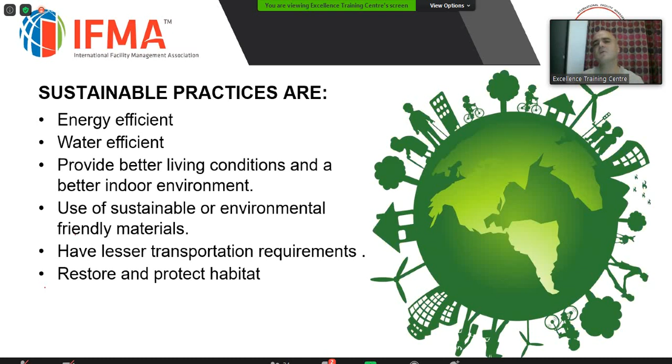All of you have looked at documentaries which show how much the greenery and natural habitat of animals have receded over the years. They say the most dangerous animal on this planet is us, human beings, because we superimposed ourselves on all other animals. We took their natural habitat, and in many areas we're paying the price. It doesn't come for free. Now the temperatures on Earth are higher than ever before. We're having floods in some parts of the world, and tsunamis, and lots of environmental change due to human impact.

So why shall we adopt sustainable facility management? It adds business advantage. IFMA has a very practical approach - they understand that if something doesn't make economic sense, companies won't adopt it, no matter how noble it is, because in the end companies seek to generate profits.

We will see how they consider something called the triple bottom line. We'll look into the definition of it - what it means is balancing the environment, balancing the economic aspect, and balancing human needs. These three we call the triple bottom line. It's a very practical, pragmatic approach which I really appreciate.

Sustainable facility management adds business advantage through increased company branding and image because of sustainable acts. Now with the new generation, and even the older generation, people are much more conscious toward the environment, and they like to buy products made from recycled material. Popular products like Starbucks advertise this everywhere - their cups say made from recycled paper. Google advertised how most of their facilities now run on 100% renewable energy. So it definitely has a big business advantage through company branding and image.

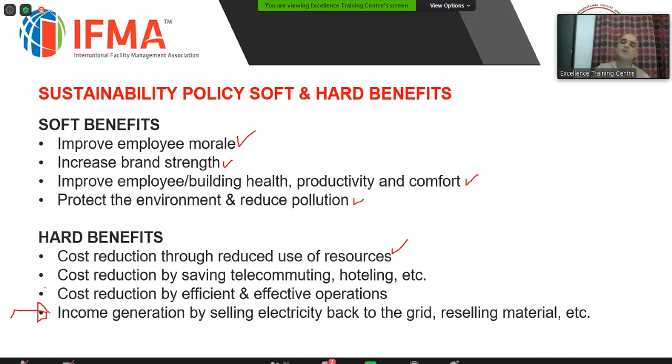The benefits of aligning the FM plan with the overall organizational strategy: whenever you want to do a plan as an FM, if it's aligned with the overall organizational strategy, it's going to take the management support and blessing. We will see this happening, whether it's for sustainability, health and safety, operations, or strategy. There's a separate module on strategy. The strategy starts with something on the top and gets affected into the day-to-day operations.

Examples, as I mentioned last time, there are two major real estate companies here which I use as an example. One is Ezdan, which is focusing on a strategy of having affordable accommodation. Another one is Al-Asmakh, or let's say Al-Fardan, which is focusing on luxury accommodation. Their strategy is different, their approach is different. And that reflects into everything they utilize, starting from what brand of ACs they utilize in their building. One company is trying to maintain a low cost, another company is trying to maintain a luxury.

So even the design of the compound, this company is making it with less amenities. The other company, because they want to reduce the cost to everyone... the other company is focusing on better amenities and charging a price for it. So similarly, if let's say you are a facility manager working in either of those companies, you have to make sure that whatever you're doing is in line with the organizational strategy.

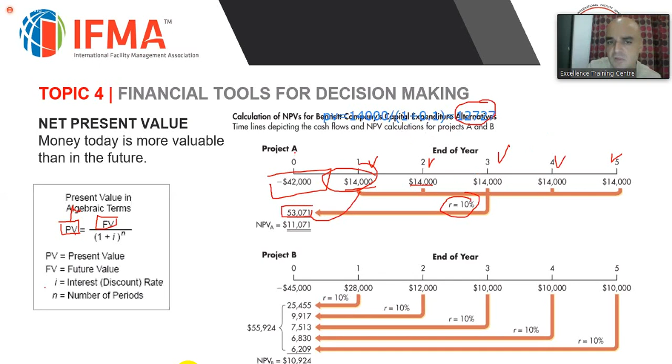So we are measuring everything in terms of net present value. Net present value is going to be 11,071. If the net present value of a project is positive, it means it's profitable. But if I'm comparing project A and project B, and the net present value of project A is higher than project B, it means project A is more profitable from a financial perspective than project B.

Everything else equal, it means that I will have to go with project A. So this is one of the tools that can be utilized to analyze the profitability of a project or an initiative.

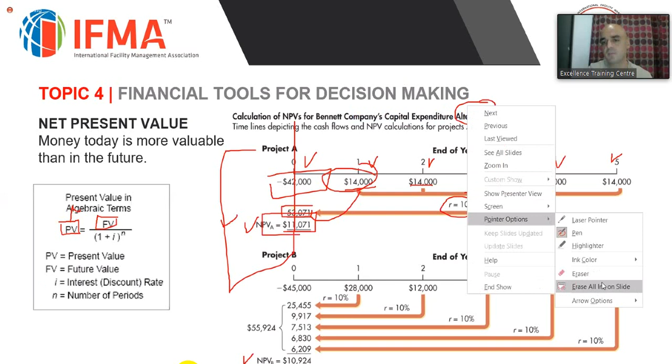Another financial tool for decision making, and this is an important tool when we're doing facility management, is called the life cycle cost analysis. Life cycle cost analysis is the whole life cost, or what we call it the cradle to grave. So the life cycle cost refers to the total cost of ownership over the life of an asset.

So when I'm comparing the procurement of AC A versus AC B: AC A costs 1,000 riyal, AC B costs 1,500 riyal. Shall I go for AC A because it's cheaper? No, not necessarily. Why? Because maybe when I'm looking at it from a life cycle cost analysis, even when I'm buying things, maybe AC A will have a lifespan of only 3 years, and after 3 years I'll have to purchase another AC. Whereas AC B will last me for 5 years.

So I'm looking at it: how much is the total cost of ownership from cradle to grave? What's the cost? Its design, installation, operation, the energy bill of it.

Maybe it will still last. ACB will last 3 years and ACA will last 3 years, but the bill that I pay for ACB is much less than the bill I pay for ACA. Then I'll go for option B.

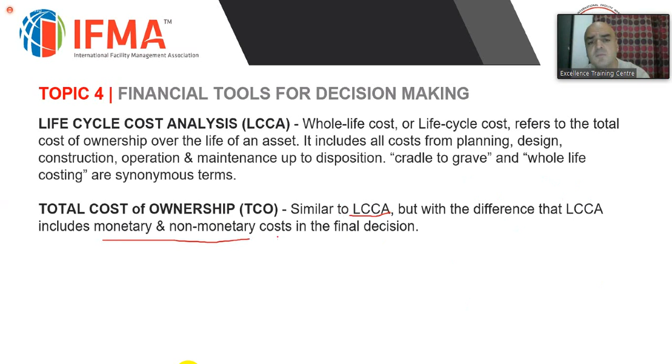This is what we call the life cycle cost analysis. I'm talking about the cost of a building from point A till its death. The total cost of ownership is similar to the life cycle cost analysis, but with the difference that the life cycle cost analysis includes monetary and non-monetary costs in the final decision.

Measuring and reporting, as we said earlier, an important thing to measure is to know. This applies to quality, energy conservation, financial reporting, and all. If you tell me that I lost 3 kilos, I will ask you based on what? You will not know if you lost 3 kilos if you didn't know that your weight was 80 kilos and now it's reduced by 3 kilos. So first is to measure.

You need to establish a starting point. If you want to measure how much you are losing weight per month, yes, Sheikh. Sheikh, you had a question? You can unmute yourself, no?

Can you hear me? Hello? Yeah, can you hear me? Yeah, I can hear you now. You were mute. Yeah, okay.

I just wanted to know, in the FM industry, do we have any standard ratio between the cost of a building and the cost of operation, or a thumb rule understanding? Okay, the cost of building, say, is 30 million. So over the period of 20 years of operation, how much could the cost of operation be? Do you have any such calculations in FM?

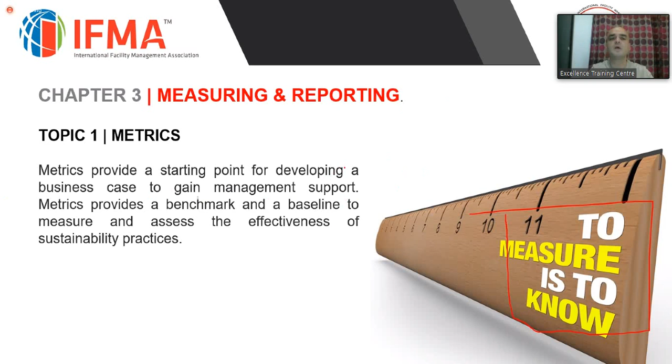Operational costs are very high. So metrics - we come back again to measuring and reporting. Metrics provide a starting point for developing a business case to gain management support, and provide a benchmark and baseline to measure and assess the effectiveness of sustainability practice. To measure is to know. You cannot tell me your building is energy efficient if you don't know how efficient it is - I'm going to ask you for proof.

Measure the greenhouse gas emissions. The greenhouse gases resulting from burning fossil fuel for electricity, heat, and transportation cause a greenhouse effect that keeps some of the planet's heat, that would otherwise escape the atmosphere out to space, trapped. Do you know what the greenhouse gas effect is? This is Earth - I'm sure you took it in science class, but again, this is Earth.

The burning of fossil fuels produces mainly carbon dioxide, and also carbon monoxide. So what happens is we have the atmosphere around the Earth, and usually the sun's rays come, hit Earth, and get reflected. Due to these greenhouse gases, a layer forms on top, and more sun rays get trapped inside - they don't escape into the environment. Sorry for my horrible drawing, but I think you get the idea. So what happens is the temperature of the Earth increases.

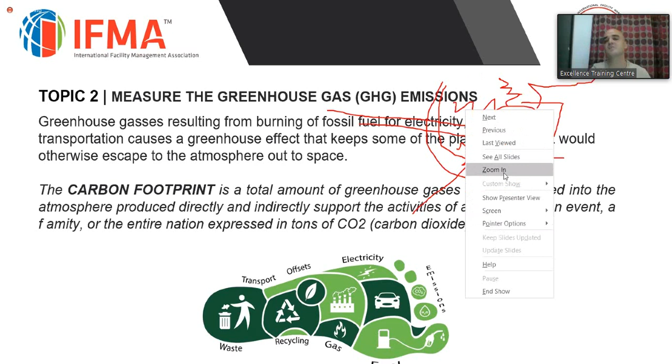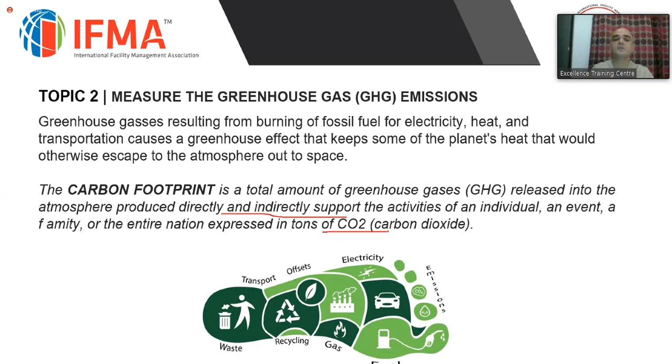So that's why we have what we call global warming. It's usually measured by the carbon footprint - most of you should have heard of it. The carbon footprint is the total amount of greenhouse gases released into the atmosphere, produced directly and indirectly, to support the activities of an individual, an event, a family, or an entire nation, expressed in tons of CO2. So now they rate organizations, airlines, specific businesses, even industries - such as the cattle industry, which is one of the biggest contributors in the world to CO2 due to the methane gas produced by the manure of cows. This is called the carbon footprint.

When we talk about direct and indirect, what does that mean? There are direct things - Scope 1, direct. These are the greenhouse gases, including CO2, hydrofluorocarbons, PFCs, and so on. So there is direct cost - let's say you have a company facility and your vehicles. These are direct costs. But there's also something upstream and downstream.

Upstream, you have business travel to your organization, employees coming to your office every day, leased assets, waste generated in operations, transportation and distribution, and so on. And down the line, you also have transportation and distribution. Let's say your organization produces potato chips - the impact of your product continues down the line until it reaches the client. So greenhouse gases have direct and indirect results.

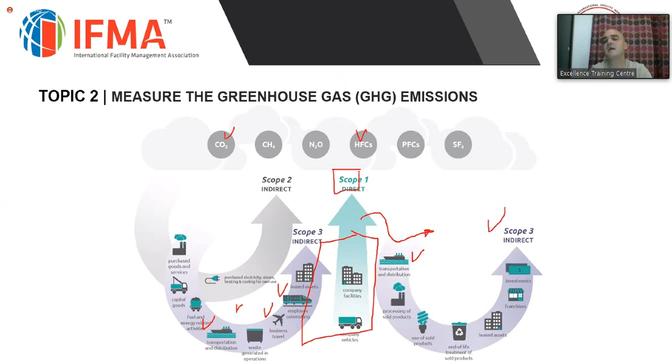There are certain standards that take care of sustainability. The most common one, which we are all familiar with, is part of the integrated management system, which includes ISO 9001 for quality, OHSAS 18001 for health and safety, and ISO 14001 for the environmental management system. There is also ISO 15192.

Anyone want to question something? Fahad, you opened your mic. Please, if you don't need to talk, don't open the mic.

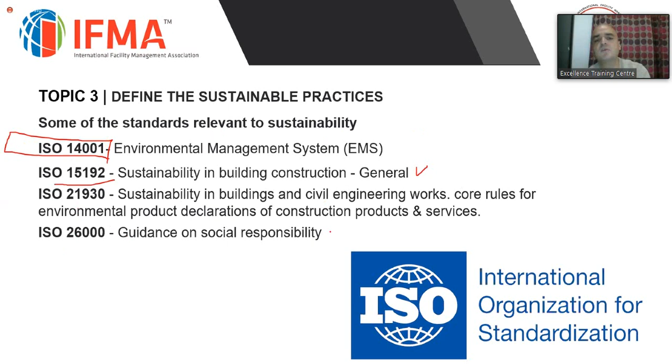So, sustainability in building construction - this is another standard, ISO 15192. There's also ISO 21930, sustainability in buildings and civil engineering works, and ISO 26000, guidance on social responsibility. These are just different codes provided by the ISO.

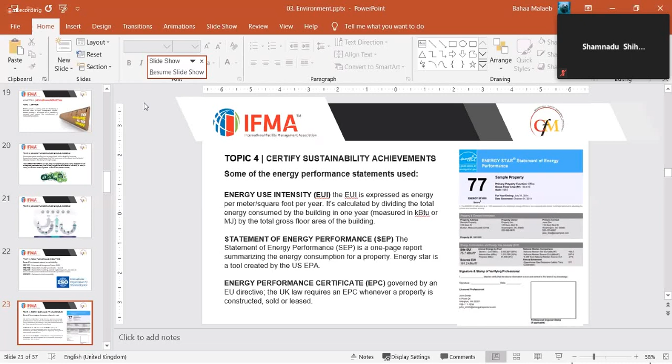So we were talking about some of the tools that can be utilized to measure and be utilized for sustainability practices. Does anyone know, has anyone seen this logo before? I remember it was coming in the startup with the PC. Yeah, you are old enough.

So this is the Energy Star. We're going to be looking at it. This is again one of the tools we will be looking into. Energy use intensity, EUI, is expressed as energy per meter square foot per year. It's calculated by dividing the total energy consumed by the building in one year, measured in kBTU or megajoules, by the total gross floor area of the building. This was a question asked to me earlier: how can you see a building's efficiency? This is one of the tools to measure building efficiency, because energy use intensity in a year per square meter or per square foot shows how much energy is being consumed by this building.

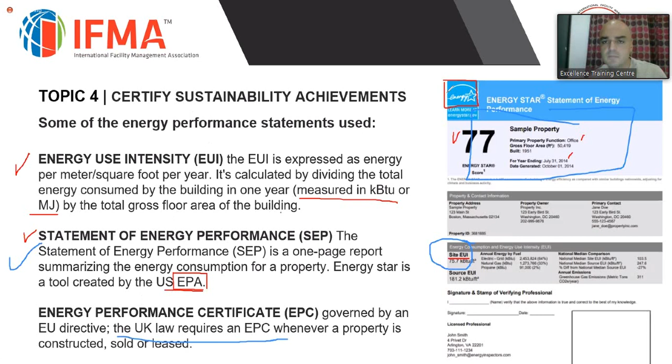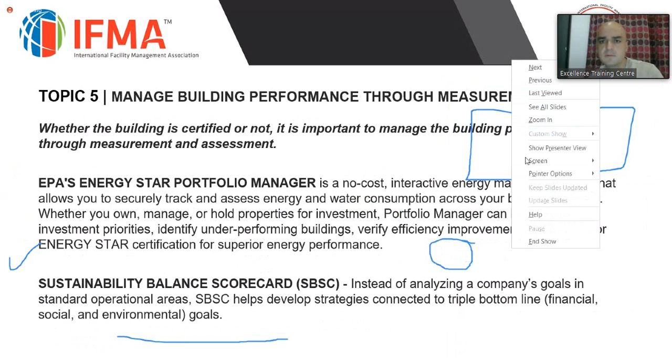Whether the building is certified or not, it's important to manage building performance through measurement and assessment, a tool by the EPA Energy Star. This is the definition from the EPA, the Environmental Protection Agency: Energy Star Portfolio Manager is a no-cost interactive energy management tool that allows you to securely track and assess energy and water consumption across your building portfolio. So you can even use it for all your buildings. If you're a real estate company with hundreds of buildings across the world, you can use Energy Star to record the data for each building and track their energy and water performance. Portfolio Manager can help you set investment priorities and identify underperforming buildings. When you start measuring, you start comparing. For example, my offices in Doha are way more efficient than my offices in Saudi Arabia. Per square meter, I'm utilizing this much energy in Doha, whereas I'm utilizing double that amount in Saudi Arabia, and so on.

Another tool is the Sustainability Balance Scorecard. The Balance Scorecard is a tool utilized by organizations to measure aspects of a business other than financial ones. What does that mean?

You see on the side sticker of new cars a rating of the vehicle, A, B, C, D, E, F, G. Similarly on ACs you see different stickers managing this. Different countries have different ways - the Europeans have their own measurement tool, Qatar is developing their own using GORD, and Saudi Arabia has their own rating system. That's why when you purchase ACs or washing machines at Carrefour, you'll find a star rating system showing energy efficiency. Even GORD recently installed a lab, and now they will require this for equipment too - they're gradually building it up.

We have an authority for standardization here in Qatar, a governmental authority, but it's a different one from GORD. The Qatar Standards Institute - I think it's called Qatar Standardization - they're the ones who make the Qatar Construction Code, QCS, Qatar Construction Standards. Each country tries to localize and customize based on their needs, priorities, and how they measure things. They're starting this now and it's getting more traction.

That's why you now have Tarshid, for example, in Kahramaa - they're trying to reduce electricity and water consumption, and it's a need. Why? Although we don't have potable water in Qatar, we don't have storage of water - all the water we utilize is desalinated. Desalination is a very high energy intensive process, it costs money and causes environmental damage. Qatar is very highly polluting per capita due to the presence of oil and gas facilities, so they are working on all of this in accordance with international accords and commitments, and improving a lot.

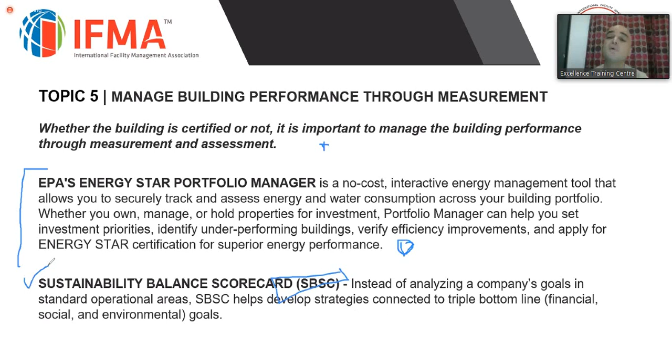So continuing on the sustainability balanced scorecard - financial tools will be covered in detail in the business unit, how to measure organizations. In a nutshell, sustainability can be added as a goal or as a tool to measure your performance as a company - how sustainable you are. It's like adding another layer to your measurement which includes sustainability.

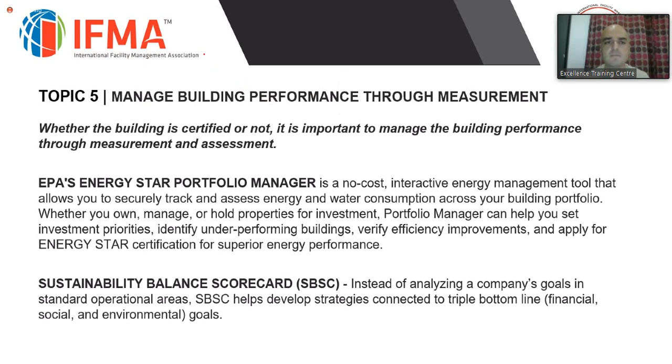There are focus areas for sustainability. In sustainability in FM operations, we said there are 8 areas, and these 8 areas are divided into input, process, and output. Input is in terms of consumption - how much energy, water, materials, and resources I am consuming.

Process is how I do things, how I manage my workplace, how indoor environment quality is measured. For example, am I setting the temperature at 18 degrees Celsius - then the inputs will change. Am I putting it at 25, and so on. And the quality of service - what services am I providing there.

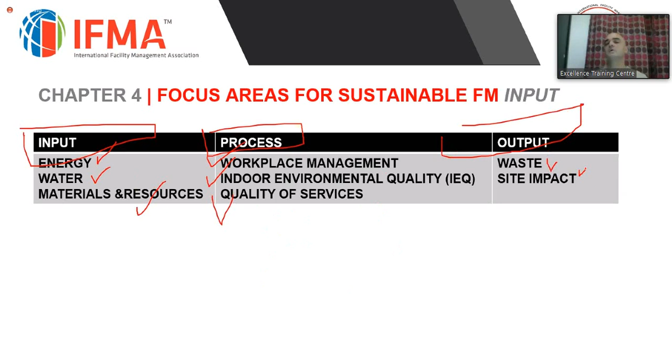The output is the waste and site impact. The waste is what we are producing, whether water waste or noise. The site impact is how much I'm affecting the environment around me - am I causing light pollution, heat pollution, other disturbances, noise pollution, and so on.

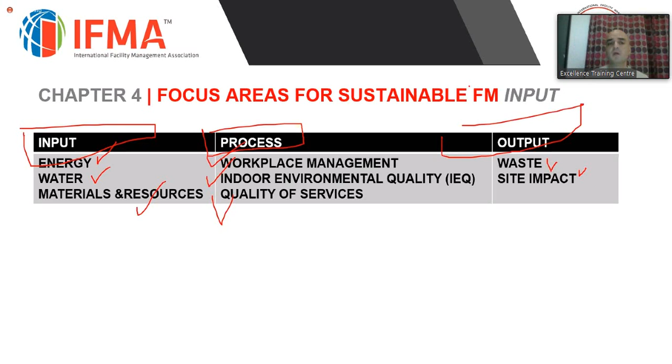So looking at them one by one: energy. Some strategies to lessen facility energy usage include improving the building, adding insulation, inspecting solar gain, or improving core systems. Energy and water are among the most prominent areas where you can make immediate savings, especially if you start in the design process - that's why rating systems like GORD's start with the design. The Qatar Green Building Council is separate from GORD.

GORD is separate. It's the Gulf Organization for Research and Development, or something like that. They were trying to create something that applies not only to Qatar, but to the whole Gulf - that's why they called it GORD, not Qatar whatever. I think the Qatar Green Building Council started on it, but I don't want to give theories - I don't know. I know the main thing is through GORD and the GSAS certification, not the Qatar Green Building Council.

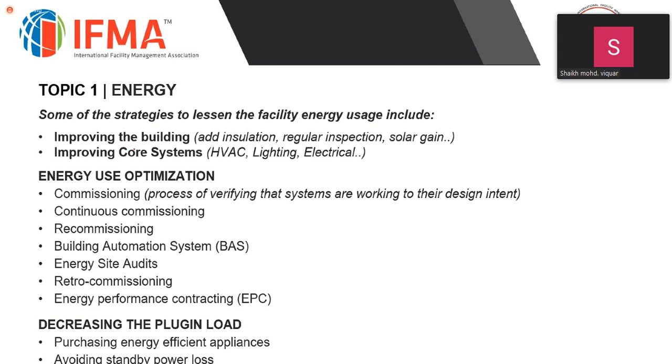So, energy use optimization starts with the design. If you utilize good design, that definitely costs more. If you use good insulating material, your energy bills will be cheaper.

GORD is supported by Qatar Foundation and the SC, the Supreme Committee. They have their offices at the Qatar National Convention Center, the QNCC, and they have very nice facilities on the backside, including a laboratory there.

Energy use optimization, continuous commissioning - there are some other tools. You can improve the building by adding insulation, regular inspection to check for leakage, improving the core systems, the HVAC, the lighting, and the electrical. In a typical building, the most energy consumption comes from the HVAC - it's 40% to 60% of the energy consumption. Then comes lighting, then other things like electrical, depending on the building type.

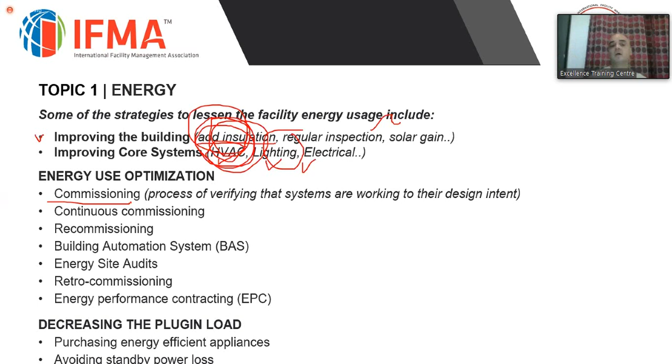You can optimize energy use through commissioning. Commissioning is not only testing the building and equipment - it means making sure the equipment is operating as per the intended design. For example, if I'm installing a pump that's supposed to provide a certain water head at a certain energy consumption, and commissioning shows it's not giving me that water head at that energy consumption, it means I need to do some adjustment to the pump. Commissioning is the process of verifying that systems are working to their design intent.

That's why an important concept in energy optimization is called continuous commissioning. It means that, unlike the usual process where you check the system once at handover and everything is perfect, the biggest challenge happens during operation. If a building is efficient at handover, but down the line you don't maintain it properly or check your systems properly, what guarantees that you're still operating at normal efficiency? So we have continuous commissioning, which means continuously checking the performance of equipment based on the intended design.

This continuous commissioning has been made much easier now using smart equipment. Those of you who operate facilities with new Trane chillers, York, or whatever, you have continuous live charts showing how much energy is being used. They're linked directly to your building management systems. You get graphical, historical data, and immediate data on your efficiency - you don't need to go check it separately, you get this data on an instantaneous basis.

Building automation system is very important. So what's a building automation system? A BMS - building automation and control system, or building automation system, or building management system - is very important because it controls the utilization of your HVAC and other systems based on your occupancy needs.

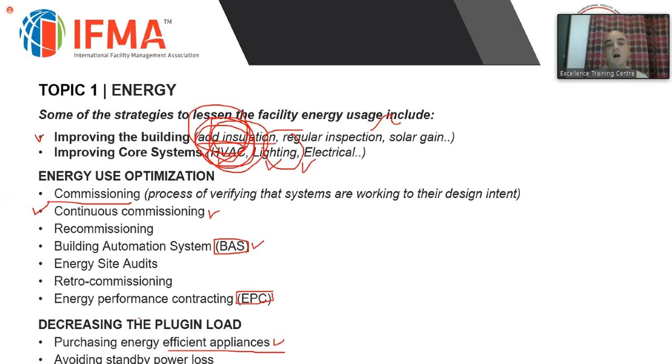Avoiding standby power loss.

Use of on-site renewable sources of energy. There are many ways to do that. We all know the famous solar power panels. Solar power panels are becoming much more efficient than they were, and the growth is very good. They are becoming much more reliable than before. Still, they are not 100%, but we are almost reaching there. Maybe it'll take some more years. 15, 20 years ago, they were not as efficient as they are now. Many companies are working on several technologies to try to improve the efficiency of solar panels, and generating power is there.

Another thing to utilize is called biomass. What's biomass? Usually this is utilized in farming communities and agricultural economies. The crop that you get from harvesting, let's say you have a cornfield, the stem and other parts of the corn are supposed to be disposed of. So what you do is take this organic material and subject it to anaerobic digestion, and as a consequence you will ferment it and get methane. Methane is natural gas. You can burn it and generate electricity, or utilize it to heat and dry wood chips, plus sales of biomass for boiler. This is a tool utilized in farming communities, used in the States or in Europe because they have lots of material.

How can you reduce standby power? Disconnect the items. At home, if you have plugged-in appliances, just disconnect it, remove the plug, because even if you keep the plug there, there'll be some kind of energy leakage. So this is the way to cut standby power. If it's not in use, remove it, unplug it or disconnect it totally.

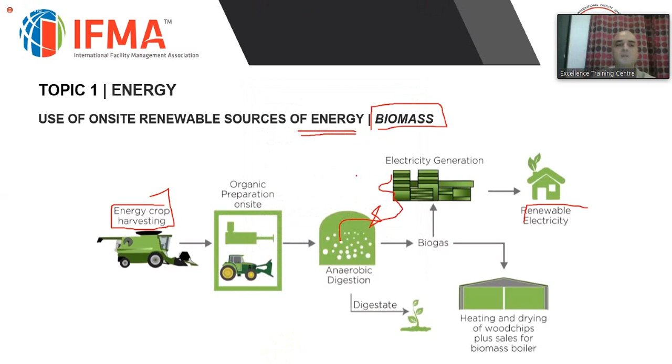Use of on-site renewable sources: geothermal energy. Geothermal energy can be on a very large scale or a smaller scale. On a large scale, there are countries such as Indonesia, which are on top of volcanic areas. What they do is drill a hole into the ground and reach a level where there is steam. So you're getting geothermal energy. You take the steam and run turbines with it, generating electricity for free. It's a renewable energy source.

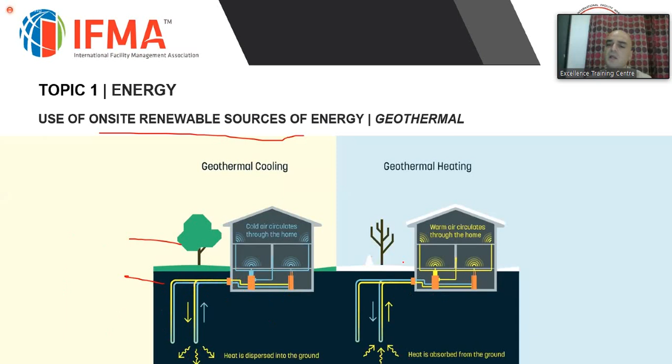On a smaller scale, it's still used in some places in Europe, for geothermal cooling. Usually in summer, the earth is colder than the surface; in winter, the opposite happens, and the earth is warmer than the surface. So what you do is take a pump and circulate water. In summer, you get cold water out and hot water in. In winter, you get cold water into the ground and hot water out.

Another utilization is micro wind turbines. Have you seen those at Qatar Foundation, Qatar Education City? These are micro wind turbines. They are put there, though I don't know how effective they are, and I don't think they are running. But again, this is one of the technologies utilized so that you can generate micro power on the side.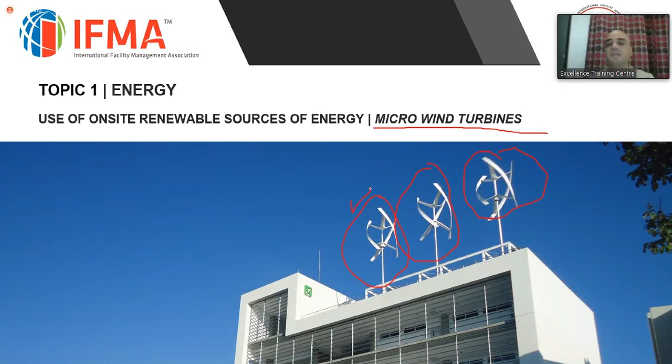So these things have been evolving, and they are the future. Yes, some of them are still not very efficient, but some of them are becoming efficient. I've seen, like, these micro hydro turbines.

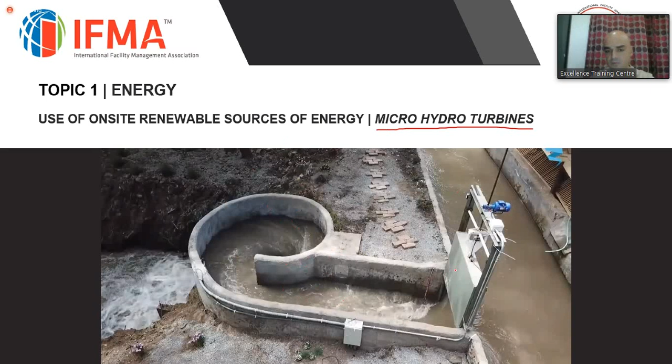I've seen them in certain remote areas. They are very efficient small hydro turbines. Let's say you're next to a river, it's a micro turbine, a smaller turbine which generates electricity from running water. With a simple installation, you can generate power, monitor management, and energy use.

There is something called load shedding and load shifting. What does load shedding mean? Load shedding means you shave the load. You say above a certain level, I cut the power. You simply cut the load.

Load shifting is that you take the load and utilize it at different times. Say you're running a factory, and rather than utilizing certain megawatts per day, you shift to a night shift, and you sort of flatten the curve. You take the items here and put them there. In load shifting, the overall consumption stays the same. In load shedding, the overall consumption is reduced.

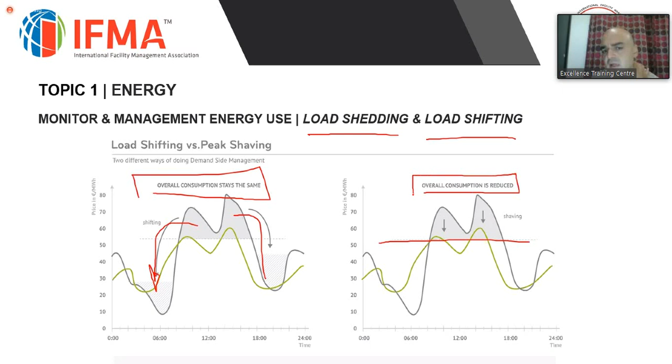Demand response contract. What's a demand response contract? It's an agreement between the facility and the power producers to find ways to reduce consumption during peak hours in exchange for monetary incentives. In other places of the world, I don't see it here.

So you're having a factory, and the government will come and tell you, look, you're consuming this much megawatts per hour, and we have a deal for you, since you're utilizing it during the day. If you shift your load to the night, I'm going to give you electricity at half the rate. So this is called a demand response contract, an agreement to find ways to reduce consumption during peak hours in exchange for monetary incentives. So the power company is trying to shift the load to match their needs.

Because what happens in power consumption, even on the scale of a country, it's not consistent. The power utilized during the day is different from the power utilized during the night, different from peak or off-peak hours. In Qatar, fortunately, we have enough resources that we don't feel it, but in other countries with limited resources, it has a huge impact, and they try to manage around it.

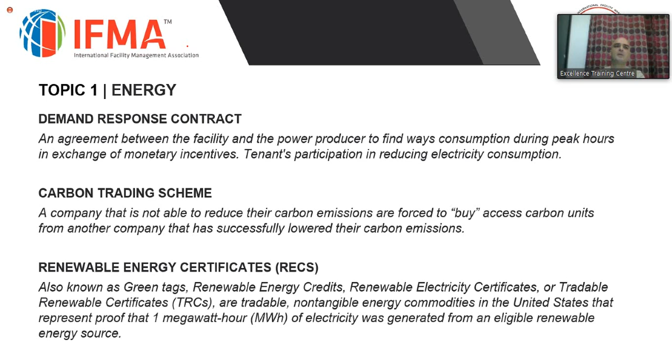What does that mean? Part of the environmental requirements is that you get incentives. If you are a company producing this much, one megawatt hour of electricity from renewables, you get this renewable energy certificate. So rather than investing and proving to the government that you're producing this, some people are making it their business. They go and build solar farms, sell electricity back to the grid, and utilize this to give to other companies who buy it from them.

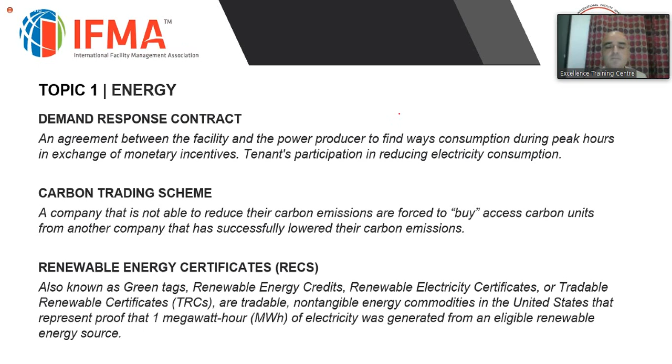Water, how to reduce water consumption. We see it now with Tarsheed and what they try to advertise: aerators, high efficiency faucet aerators. What's the aerator? It's that attachment. Most faucets now come with aerators, and they can reduce faucet usage by up to 50% or more.

High efficiency shower heads. For those of you who work with sanitary ware, water consumption has become part of the sanitary ware requirements set by consultants. Previously, toilets used to come with a standard flush bowl around 6 liters, sometimes as much as 11 liters. This was changed later on, and now you have toilets that use a half tank or a full tank option. So there are many ways for you to reduce consumption.

Replacement of leaking fixtures: leaking can represent 5 to 10% of total building water usage. You can see how large that is, so it's important to monitor leaks.

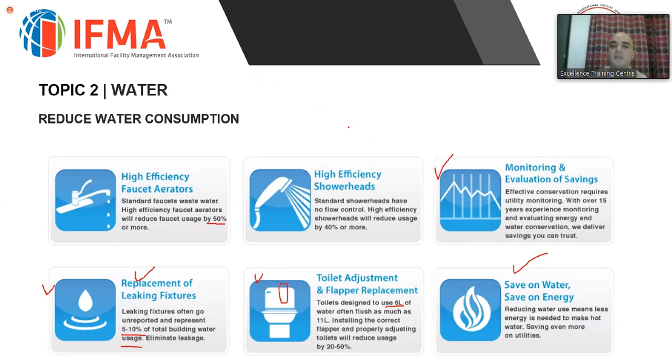Regarding water or energy consumption, there are different tariff types which countries or service providers utilize. Here in Qatar, you can design your tariff system to dictate certain consumer behavior. A flat tariff is one that stays flat - whether you use it day or night, high or low consumption, you're charged a flat rate. It doesn't direct any particular behavior.

The inclining block tariff means the first part of electricity or water usage is cheaper than all usage after it. In Qatar, they use an inclining block for residential customers. So if you have a villa in Qatar, up to a certain consumption level they charge a certain rate, which they believe is the average rate. Above that level, the bill starts becoming very expensive. That's what we call the inclining block.

The declining block is a different approach - the opposite. The first part of electricity or water usage is costlier than the rest. This is usually utilized for industrial facilities. So if you have a certain need, you pay the base rate, but if you need more, you get it at a lower rate.

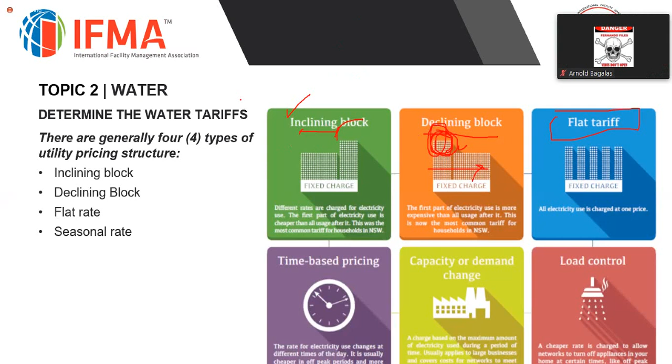So I was talking about the different pricing tools which energy and water providers utilize. We have the inclining block, the declining block. Another tool is time-based pricing. Normally energy has heavy utilization during the day when countries, factories, and offices are operating. To encourage people to shift their behavior, I can give a reduced price after midnight. This is where the rate for electricity changes at different times of day.

Capacity or demand change is again an incentive linked to demand. You go and tell the industry, if you shift your demand, I will give you a certain incentive.

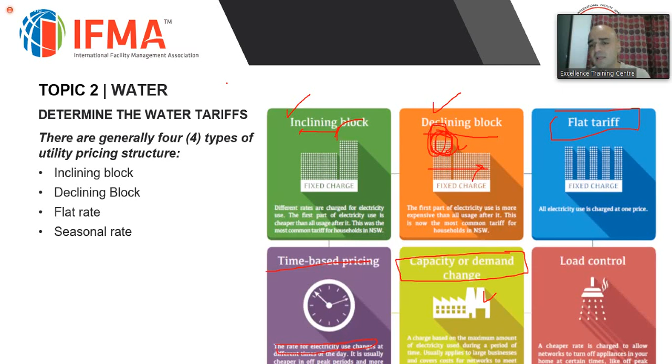Load control: a cheaper rate is charged to allow networks to turn off appliances in your home at certain times, like off-peak hot water. Those of you from countries with power problems are aware of these things. Many countries used to shift consumer behavior, even doing things on TV and advertisements trying to shift the daily home operations, telling you to wash your clothes at night, for example.

Some of the goals of sustainability are as follows. We talked about energy, we talked about water. Now we're talking about the third input, which is material and resources.

We talked about using less material, using material from recycled or sustainable sources. So rather than utilizing raw material, in terms of wood or water, companies will tell you this is made from recycled paper, or made from repurposed wood that they compress.

Purchase materials in a sustainable manner. The most famous paper manufacturers, if you read the labels in detail, will say this is done in a properly harvested forest, made from trees controlled in a sustainable manner, and that they are planting trees sustainably rather than tearing down the rainforest.

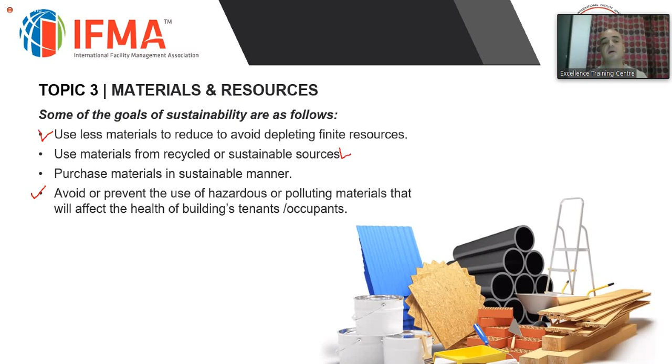Avoid or prevent the use of hazardous or polluting material that will affect the health of building tenants or occupants. An example is asbestos. It was used a lot in buildings as a good insulator, but then they found out asbestos is carcinogenic, and it took the world several decades to try to remove it as a construction material. Maybe some countries are still utilizing it, I don't know. It's a highly carcinogenic material.

Sustainable procurement is meeting the needs of material, goods and services in an environmentally friendly, responsible, and ethical way. So ethics come into play also, in how much you are supporting the local economy. Many companies promote that they are buying products produced by the local community.

Sustainability means continuity. It means we are not only doing it for the sake of profitability, but to carry the people around us. Some companies will use material and say it's manufactured by veterans or by prisoners and so on. These are again tools for sustainability.

Benefits of green procurement: savings, positive relationships, improved employee health, environmental and climate protection benefits, promoting the local economy. We see the same benefits of adopting sustainable practices repeated again and again.

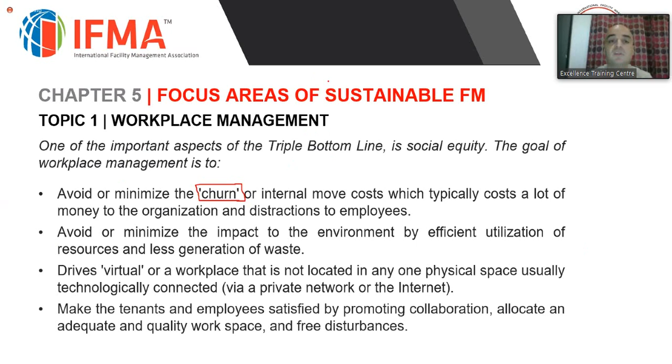Flexible use of workplace, apart from efficient space utilization and avoidance of unnecessary office expansion, the power of flexible workspace is to increase collaboration, which will result in greater employee productivity.

A virtual workplace is a workplace that's not in one physical space. This is what we talked about with hoteling and telecommuting. Telecommuting means working from home or similar. Hoteling means that I don't necessarily have a permanent place in the office, I don't need a designated space—think of an organization that has people who are on the sites.

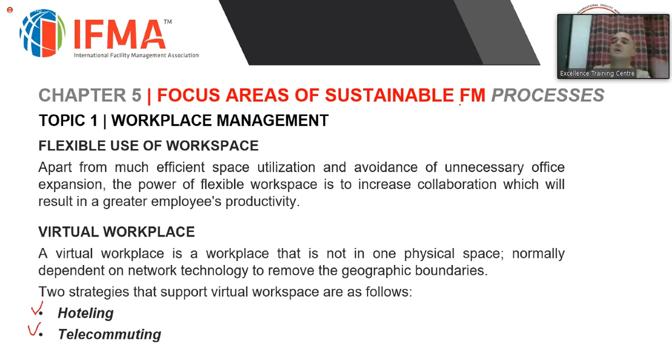I don't need to keep an office room for each and every manager I have. I can have hoteling, which means a unit of desks that are free for whoever comes, and we can book them and utilize them. This is again a modern way of dealing with space management.

Usually organizations follow a global trend of moving towards smaller spaces, where people can work from home more. We've seen this, and COVID-19 really pushed heavily in that direction. We found out that many jobs can be done from home, with little or even better improvement in efficiency.

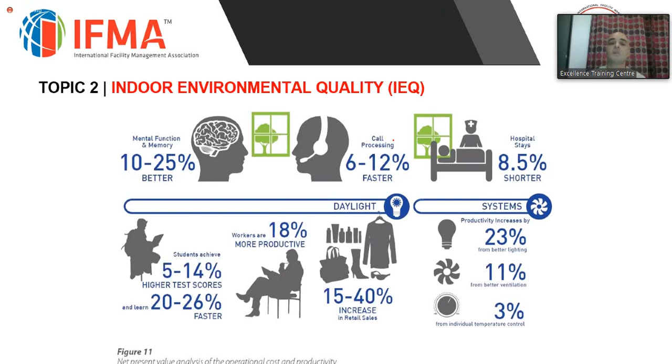Another thing is indoor environmental quality. This is an extract I took from the health and productivity benefits of LEED certified buildings, a net present value analysis of operational cost and productivity. Not only does operational cost get reduced, but productivity improves, because indoor environmental quality considers air quality, temperature comfort, and even how much sunlight you're exposed to. These things affect your productivity. This research shows better memory function, mental function, better call processing, shorter hospital stays, more productive workers, more productive students, and increased retail sales due to the better environment and comfort of shoppers.

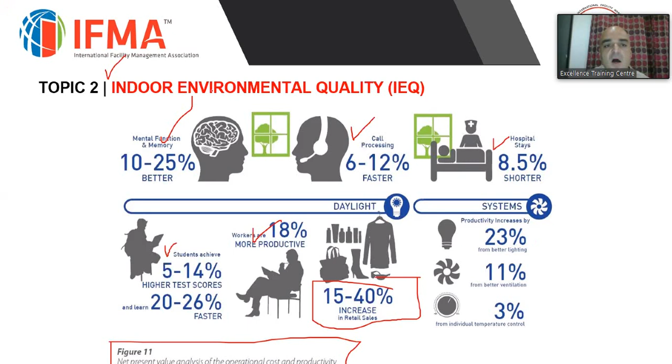For example, a very simple illustration: there's a whole science in marketing called consumer behavior, and big organizations have made it a science. That's why when you enter a Carrefour, the lighting is always very bright, 24/7, and Carrefour doesn't have windows for sunlight. Why? Because they want you to lose the concept of time. They've done their research, and with higher, more comfortable lighting, you're likely to spend more time at the store. When you spend more time at the store, you spend more money. So we can see how indoor environment quality has a huge impact on our behavior.

Air quality is part of environmental quality. As I said previously, the air inside is more polluted than outside, typically 2 to 5 times more polluted. 90% of our lives are spent indoors.

Maybe in Qatar, hoteling means hot desks. Yes, Najitha, this is what it means. Hot desk is part of hoteling. It can be hot desk, hot offices, and so on.

Indoor environment quality involves common indoor pollutants. There are many pollutants indoors: airborne particles from diesel exhaust, dust, smoke, and other sources; indoor formaldehyde from furniture, cleaning chemicals, lack of proper circulation, and the air we breathe out from people all contribute to bad air quality. That's why it's very important to have proper ventilation, starting from the design of the HVAC system, to its operation, and to its monitoring.

These are different things which can generate bad air: smoke, poor circulation, toiletries, mold. Mold is a very bad influence on indoor environment quality and air quality, and it can create serious health problems. Cooking fumes, candles, electronics, and so on also contribute.

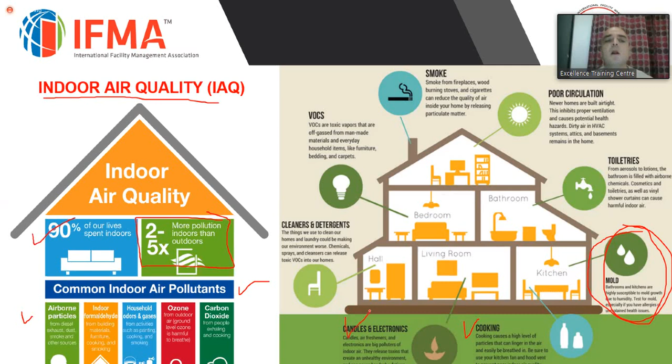So there are many things that can affect occupant comfort, including thermal comfort. The number one complaint of building occupants globally is thermal comfort. This is shown by research—people complain that it's either too hot or too cold, too drafty, or too windy.

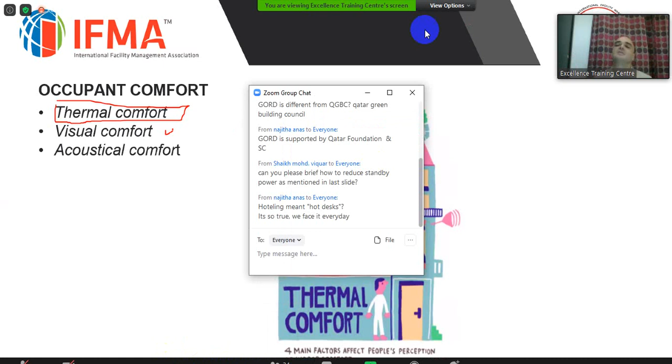Visual comfort is also important—how relaxing it is, how the lights are, how crowded the place is. That's why when you go into a hotel, everything is designed to make you feel relaxed. Even when you enter, fresh flowers are put there, the colors are vibrant, and the design itself includes a huge lobby. All of this is for visual comfort.

Acoustical comfort is about what you hear, how much sound is coming in. All of these four factors contribute to occupant comfort.

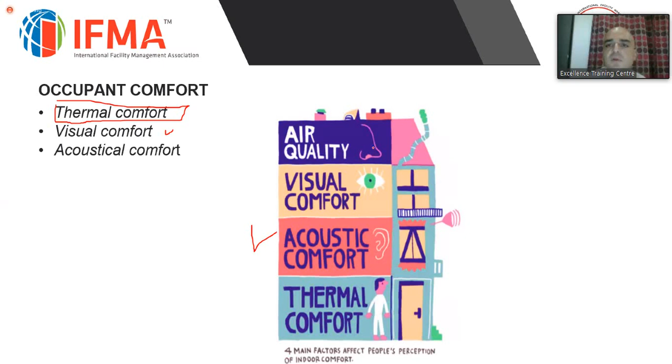Control of hazardous material. A hazardous material is any item or agent which has the potential to harm humans, animals, or the environment, either by itself or through interaction with other factors. There are different ways to handle hazardous materials. The best is to eliminate, physically remove the hazard. Substitute it - rather than utilizing a harsh chemical to clean the floor, use something environmentally friendly. Engineering controls isolate the workers from the hazards. Administrative controls change the way the work is performed and change the cycle of operations. The least effective is keeping everything as it is - it's inevitable, but to protect people you let them wear personal protective equipment.

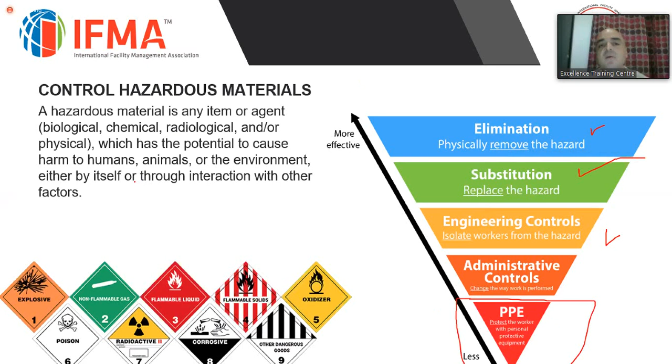Quality of services. Sustainable services are offerings that satisfy customer needs and significantly improve social and environmental performance. This can happen in terms of sustainable mail services, sustainable meeting services. So in the way services that you are offering, whether they are mail services or meeting services, you can adopt sustainable practices to handle them.

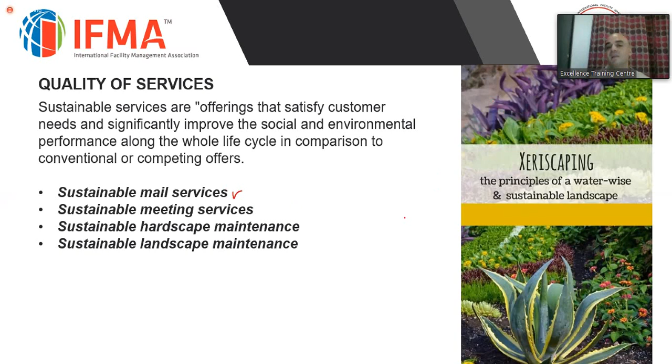One nice topic to mention is landscaping - sustainable landscaping through xeriscaping. What's xeriscaping? It's designing from day one, designing the landscape to utilize less water. You can maintain a beautiful garden which requires less water.

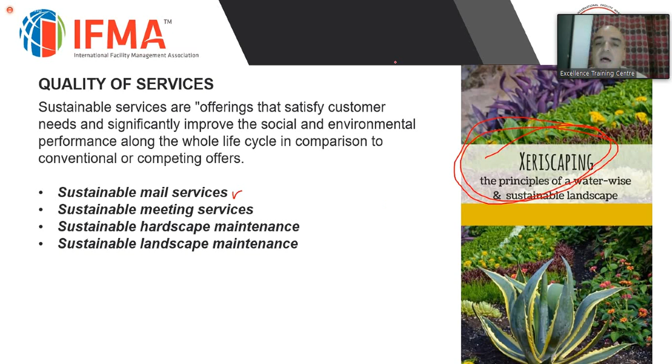If you observe, one of the areas where they have utilized this is the airport - the new airport. If you look at the landscape of the Hamad International Airport, you can see a different type of plants there, mostly desert-based plants. They are beautiful, but they use less water compared to, let's say, the flowers planted on the Corniche. You see how unsustainable they are - very beautiful, but they need a lot of water, and a lot of changing because the plants die quickly. So xeriscaping is the concept of utilizing plants and design from day one to secure sustainable operations.

We talked about the input - the energy, the water, and the material and resources. We talked about the process, and now we're talking about the output. The output, we have waste. Waste collection is a part of waste management. It's the transfer of solid waste from the point of use to the point of treatment or disposal, to the landfill. Methods of solid waste disposal and management.

Composting. There are different ways to handle waste, going from the environmentally conscious ones to the very unenvironmentally friendly ones. Open burning is a horrific way to get rid of waste - you are throwing carcinogens and fumes into the environment. Composting is a very good way, but it doesn't apply to everything. Composting is when you bury items which are biodegradable - you can compost natural materials such as wood, such as food waste.

Dumping into the sea, again, is not very sustainable. Fermentation or biological digestion - this is what we covered regarding biomass - you go and ferment it, but it depends on what waste you are dealing with. Incineration means burning, and it's typically used for certain things which cannot be disposed of properly - for example, medical waste, which you cannot recycle. It is not good for you to recycle it; you have to incinerate it, burn it at a certain degree to remove all the chemical pathogens. Salvaging means restoring it - maybe you can utilize it in something else.

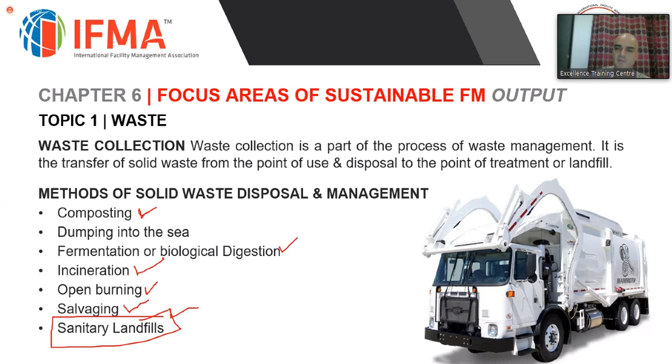A common way for disposal is sanitary landfills. Sanitary landfills are where you segregate the material, compact it, and bury it underground in a proper way, taking care of water collection with a designed system. This is a very common way of handling waste - many countries utilize sanitary landfills. After they have segregated the material, seen what can be composted will be composted, and what can be recycled will be recycled, the rest goes into sanitary landfills.

Construction and demolition waste management. Wastage resulting from construction and demolition includes concrete, wood, gypsum, glass, plastic, metal blocks, etc.

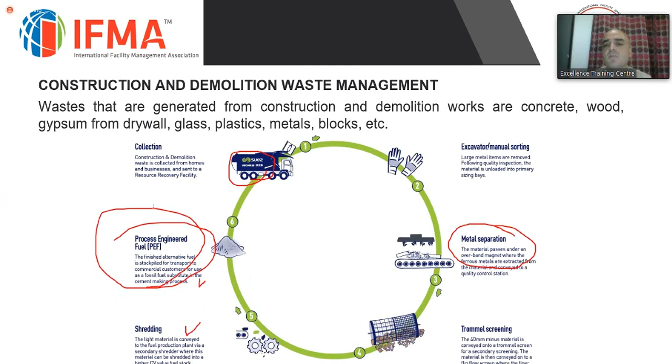This chart I took from a site of Suez, GDF Suez - this is a French company. They are famous for how they handle this, which is indicative - they take it, crush it, collect it, separate it, crush it, use metal separation, and steel can be utilized elsewhere. Then they do screening - some items can be used as processed engineered fuel, wooden products, some items can be added there, and shredding for light metal, and so on. So this is a proper way of handling construction waste.

Here, even in Qatar, construction waste has to be handled. There are certain areas where you can put it. Some years back, they opened, I think, the Mesaieed waste treatment plant - it was not there before.

A proper recycling scheme starts from the source - they call it separating at the source. That's why many recycling programs which countries try to utilize fail, because unless people are educated at the source, whether it's from homes, it won't work. That's why you find it very common in Europe and the States, because everyone is educated to it. They even separate trash in the house, putting plastic in one area, glass in another, and biomaterial in another. It takes a lot of effort - here they've tried to implement it, but so far not with much success.

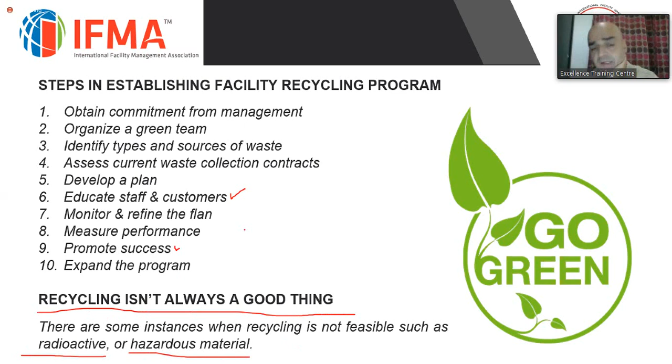I'll mention one now - biohazard material, you cannot recycle it. Radioactive material, you cannot recycle it because it will still carry contamination. Disposal of different materials requires different procedures. I mentioned previously regarding the disposal of oils and batteries - there are special companies which handle that. Chemicals and hazardous materials are also supposed to be disposed of in a different manner.

Even here, the way they dispose of chemicals is something similar to this: you're supposed to put it in a drum, tag it, flag it, accumulate the waste, and then request someone specialized to pick it up. Not everyone is authorized to dispose of this. There are specialized companies here, not many, who can handle dangerous waste, radioactive waste, oils, chemicals, or batteries. There is also a separate business in terms of electronics recycling.

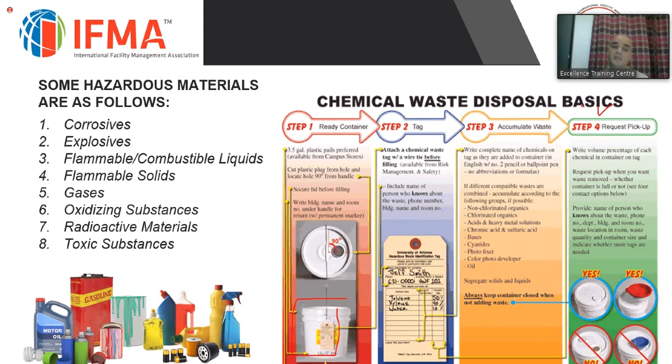Site impact. One of the goals to reduce or avoid site impact is part of our sustainability efforts - we're trying to reduce the impact that we have as a built facility on the environment around us. To reduce that, there are many ways.

Let's say we cut noise pollution - the more sustainable a building we are. If we are a self-sustaining building that utilizes the water we produce, recycling it and using it for other things, we are reducing site impact because we're not putting the water into the drainage. If we are a building conscious of the environment around it, we don't try to create light pollution, which we call light trespass - that's when light goes from our side into the outside and trespasses onto others.

One of the principles used is called biomimicry. What's biomimicry? The best designer in the world is nature - this is the best designer in the world. Those of you who are engineers know there's a separate division of engineering which looks into that. Biomimicry is the set of utilizing designs that are modeled on biological entities and processes - this is what we call biomimicry.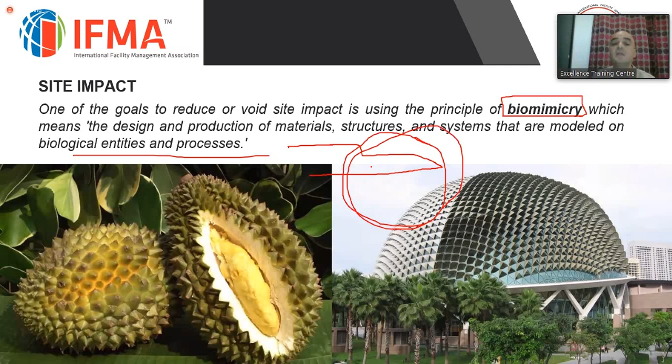For example, the fastest train in the world, the Japanese bullet train, is shaped something like this drawing - very poorly done - but the shape of that train, the head of it, is shaped on the beak of a bird that plunges into the water. They found it to be the most aerodynamic design that can be done. So this is the concept of biomimicry - when you are designing and using nature as your muse or inspiration, this is called biomimicry.

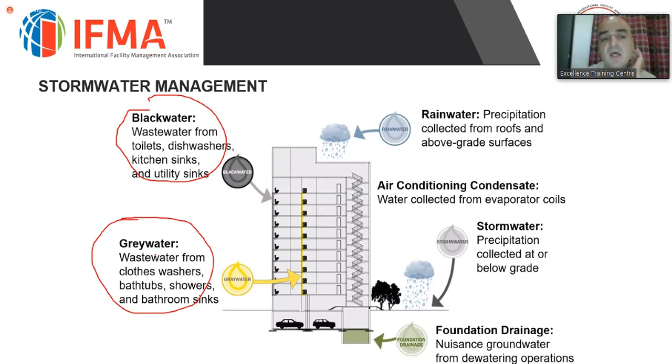Stormwater management, the way we generate and produce, handle the water is important. There is the water which we utilize, and there is what we call black water or gray water. Black water is the wastewater from toilets, dishwashers, kitchen sinks, and utility sinks. Black water usually is disposed of or taken into treatment, and you cannot utilize it again. Gray water requires less treatment for you to utilize it again. Gray water is water that's coming from the shower, not from the toilet itself, from the bathtub, from the clothes washer and bathroom sinks. So these two concepts you should be familiar with, the black water and the gray water.

Rainwater, again, there are several buildings which utilize the collection of rainwater and storage to use it for sustainable practice. You can use it for irrigation. Air conditioning condensate is again water which is produced by the facility and which you can collect because it's relatively clean water which you can use somewhere else. Foundation drainage, nuisance groundwater from dewatering operations can also be utilized in other areas.

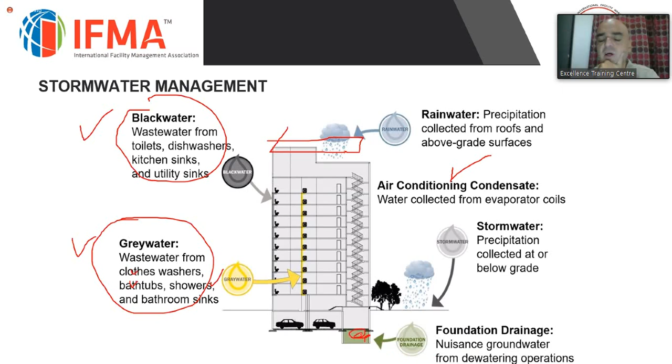Light pollution. We are talking about the site impact. Light pollution is excessive and inappropriate artificial light. It is an issue due to the adverse effects, including sky glow, glare, light trespass, light clutter, decreased visibility at night, disturbance to nocturnal species, and energy waste. You cannot enjoy seeing the stars in Doha because of light pollution.

If you go a little bit to the north or a little bit to the south, because there is no light pollution, you will be able to see the stars. This is just one example. Another example is that nocturnal species like bats, owls, and many insects and animals that live around us operate at night. So in cities, these insects and this wildlife cannot adapt. This is why there is a negative impact from light pollution. It changes the whole ecological balance.

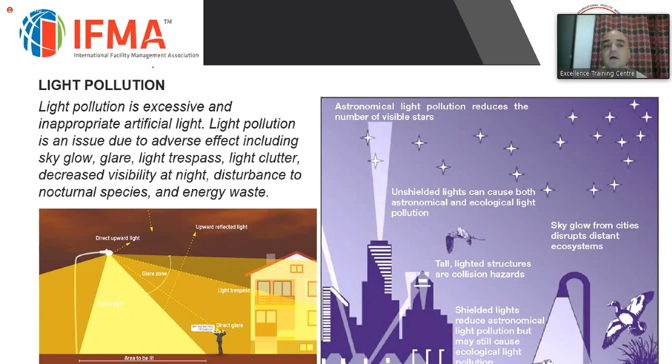Strategies to avoid light pollution: install LED or low pressure sodium bulbs, direct light to where it's needed, purchase lights with bulb caps and shields, install motion detector lights. You see it even on very large scales. Some countries have it on their highways, a very long highway where there is little traffic. You will see that a car will be passing and the light will be following the car, in the sense that the street lighting is not always on. That way you are reducing the energy consumption and reducing the damage to the environment around us.

Turn off lights in rooms that are not in use, a simple principle. Pull down the blinds. Install smart lights which can be controlled and programmed through a smart device. We are finding this concept more and more now. There are now lighting controls tied to the building management system, and the required level of lumens is directed by the system itself. If someone is in the building or not, it will adjust the lights based on that need, and that way you are reducing light usage and light pollution.

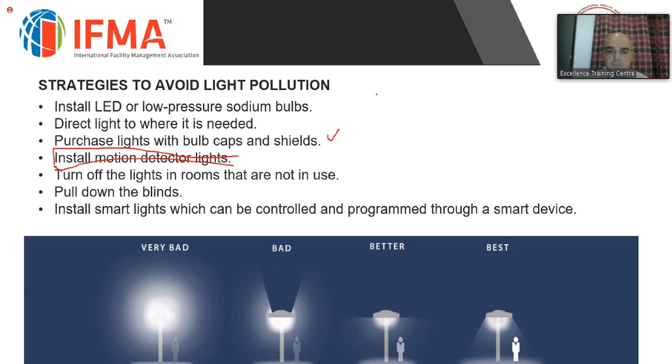Heat island effect, similar to what I told you regarding when you go to Mesaieed or Al Khor, you will be able to see the sky. Another thing you can notice is that when you go to these suburban areas, it is colder than it is in Doha. Why? Because there is something called the heat island effect. Built up areas are hotter than nearby rural areas. When you have a built up area, a city, there are many factors that contribute to a higher temperature.

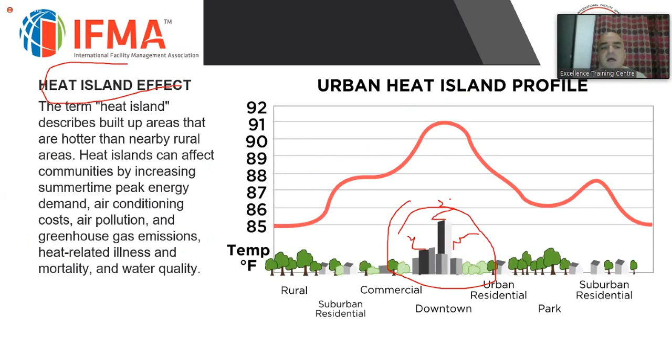You can see how the temperature increases. This includes restricted airflow, and when you have a city, you have much equipment generating heat, like chillers and so on. This is what you call the urban heat island. Heat islands can affect communities by increasing summertime peak energy demand, air conditioning cost, air pollution and greenhouse gas emissions, heat-related illnesses and mortality, and water quality. This is what's called the urban heat island effect.

Finally, managing the impact of travel. As I said initially, travel is a very carbon producing element. Business travel can represent more than 50% of an organization's greenhouse gas emissions. So if you reduce it, especially for companies such as business consultants who don't have factories or big units, just offices, but utilize lots of traveling, this can have a huge impact on the energy consumption or greenhouse gases produced by that company.

That was it in terms of material for today. In terms of questions, let us see what we can solve through this together.

A sustainability policy provides guidance on sustainable FM practices so that the present and future decisions of an organization can be made for the good of the company, the community, and the environment.

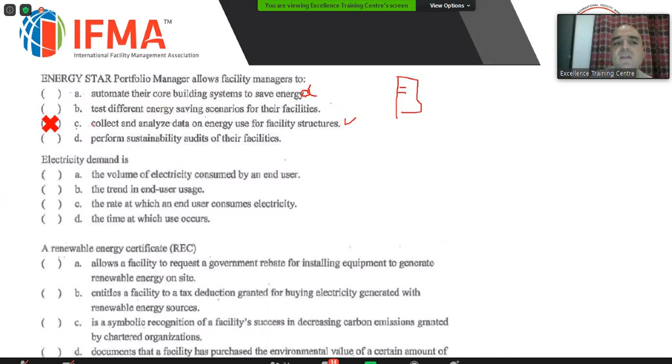Okay, let's go through them. It allows you to automate the core building - no, no, it doesn't allow you to automate. Energy Star is a tool where you collect data based on your energy consumption, and based on that you get a certain rating. It doesn't test different energy savings. It is C - collect and analyze data. Once you have the data, you can use it to automate, test, or perform an audit. Electricity demand is...

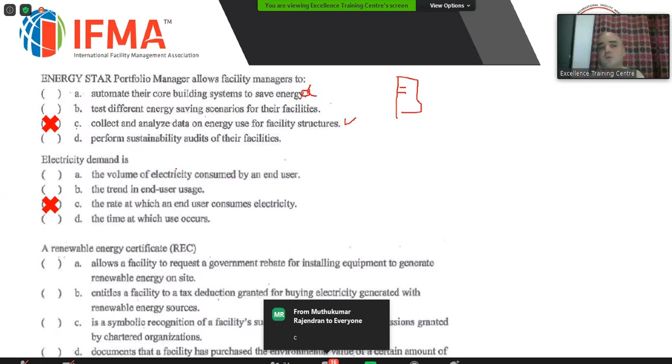It's C, the rate at which - so there is a peak demand and a low demand. It's not only the volume, it's the rate at which you are using it, how much kilowatts per hour.

What's a renewable energy certificate? A document that the facility has purchased the environmental value of a certain amount. So right, this is per definition. It's a document that shows you have produced a certain amount of energy from renewable resources.

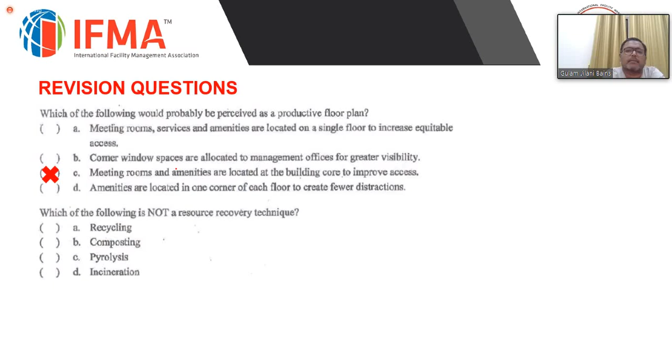Which of the following would probably be perceived as a productive floor plan? Meeting rooms, services, and amenities are located on a single floor to increase equitable access. C. Meeting rooms and amenities are located at the building core.

Why? I will go through them one by one. When you say meeting rooms are located on a single floor, that's not real efficiency. Can you imagine a building, let's say a building, and the meeting rooms are only on one floor? Would that be efficient? No. Corner window spaces allocated to management offices for greater visibility - again, this is not a productive floor plan because it's related to management status, not efficiency. Amenities located in one corner of each floor to create fewer distractions - that's not it either.

The correct one is C. Which of the following is not a resource recovery technique? D, incineration. Yes, incineration - you are burning it. Pyrolysis is a chemical process used to disintegrate items into things, so it is a resource recovery technique. Incineration, you are destroying the resource and not utilizing it.